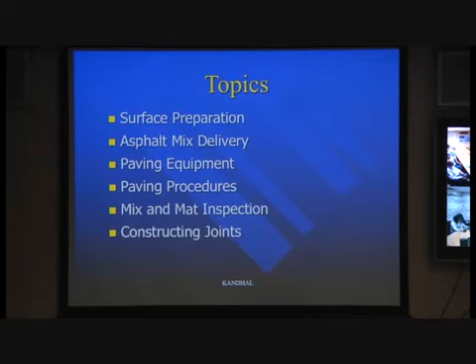First of all, you can see here that we have to clean the existing pavement. If I have, let's say this is DBM, and I'm trying to prepare for BC, and if I don't clean it and there is a layer of mud on that, and I lay BC on the layer of mud, what will happen? It won't stick there. And when I design the pavement, I assume that BC and DBM are just one slab.

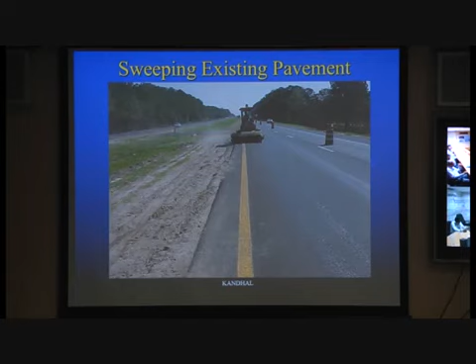If I've got a mud layer and I don't apply any tack coat, the pavement will think that it's only 40 millimeters thick, like your BC, and you will have fatigue cracking. So we've got to clean that out real good before you apply the tack coat, and then we've got to apply a tack coat to promote the bonding between the asphalt layers.

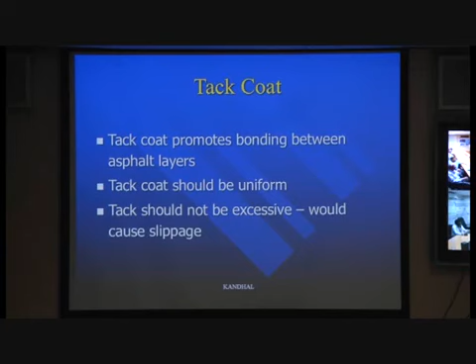That's a must. Tack coat should be uniform. Tack coat should not be excessive and would cause slippage. Some of our NHAI inspectors think that too much is good, they think the contractor is not putting enough tack coat, so they tell them to go one more time and all that. They don't understand that can cause some slippage. You might have seen some moon-shaped slippage cracks, and that will happen because of that.

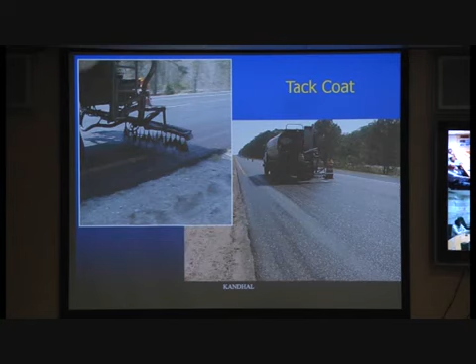So here you can see on the left side, the tack coat is being applied with a distributor with a spray bar and nozzles, and on the right side you see the bitumen distributor, the whole operation. You see the tack coat is being applied, and this is a good example of a non-uniform tack coat. Tack coat should cover the whole surface, and we use the rapid setting emulsion, not the slow setting emulsion, in India. In the US they use slow setting diluted with water, but we use rapid setting RS grade emulsion. But still we should not have this kind of non-uniform tack coat.

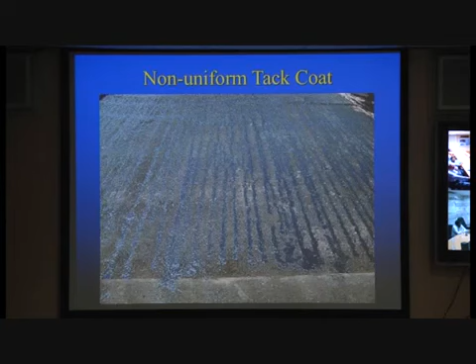Here is a good example of a non-uniform tack coat, and again it should not be too excessive. Too much is bad.

And then we have the asphalt mix delivery. We'll talk about how the asphalt is delivered after the tack coat. Well, first of all, yeah, go ahead.

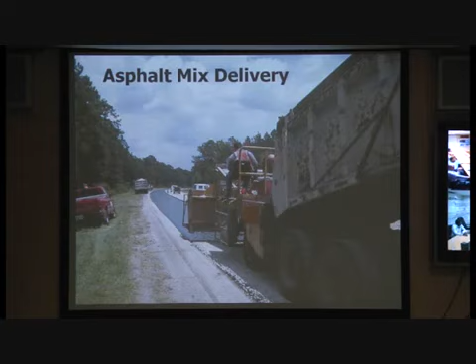The question is about when there is no tack coat. I think there is something here like a stress absorbing layer where you put aggregate as an interlayer to resist reflection cracking. Practically, one problem I have seen is after laying the tack coat, the trucks will ply on it, maybe two to three trucks at least. After plying, the tack coat is taken away by the truck. So how do we address that? Well, the question here is that when you apply a tack coat, the truck tires will stick.

The tack coat will stick to the truck tires, and some of it will be taken away. That has been a problem for many years. But since we don't need too much tack coat, and tires sometimes distribute it better, it has not caused a real problem. It looks like an issue, but even though some is carried away by the truck tires, if applied uniformly, it still covers the whole surface, so it hasn't given any problem.

But in the last few years, a new tack coat material has come out in the US that isn't picked up by the tires at all. It's called non-tracking tack coat. It's available in the US, and hopefully it will also come to India, since tack coat being affected by trucks has always been a problem.

You got a keen eye, you noticed the tack coat here. I never saw this slide before, but since I know about the stress relief layer, I could answer that. Otherwise I would have been in trouble.

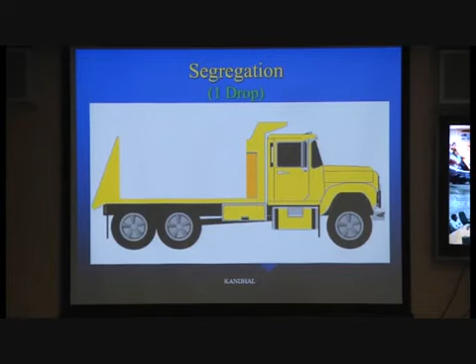This shows how to load a truck. The truck is parked below the pug mill. We can have one drop, which is not good, called segregation. When there's one big load, just one pile on the truck, that's incorrect because the coarser particles slide off to the edge and bottom of the pile, causing segregation, so when paving, some spots won't have enough fines.

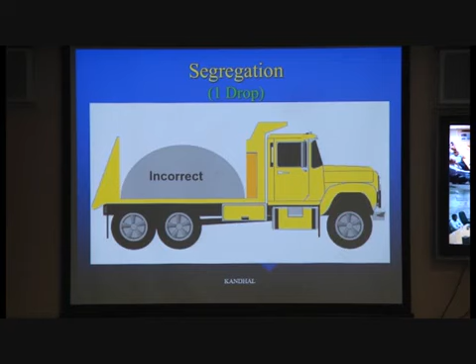To prevent that, we have to have three drops, meaning the truck has to move back and forth: drop number 1, then drop number 2 at the back end of the truck, and number 3 in the middle. That's the way to minimize segregation. But I know people don't do it.

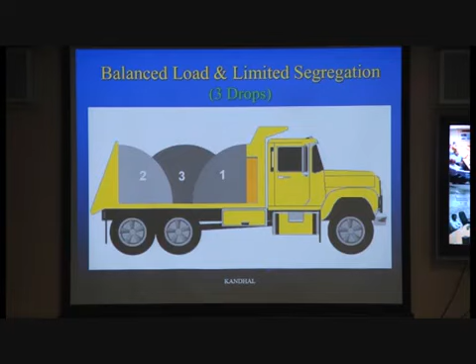Because the truck driver has to go left. They do? Is that right? That's good, they will do it. Okay, then you guys are doing good control. So that's the correct way to discharge it, that way there won't be any segregation problem.

It's good practice to always put a tarpaulin on top of the mix so it doesn't cool down, especially in winter. So tarping the load is very important. We should also check the mix temperature; some trucks have a hole through which you can test it.

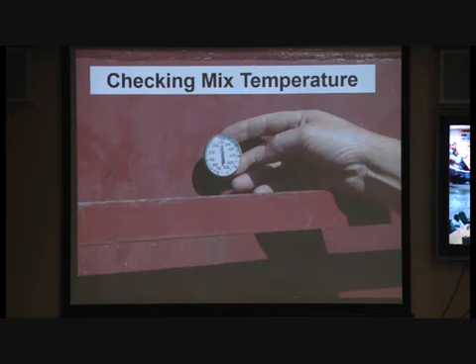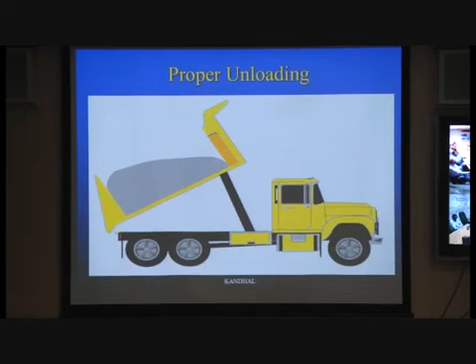Now, one thing required on national highways in the US is to have a material transfer vehicle, the so-called MTV. Because if I'm paving and there's no truck, the paver has to stop, and whenever it stops it makes a bump, sinking a little, and when you start paving again your riding quality is affected.

So what they do in the US is use this material transfer vehicle, fed on the left side—you can see the truck feeding this Roadtec MTV, as they call it. This MTV has a capacity of 25 to 30 tons, so it's always filled with hot mix, supplying the paver hopper so the paver keeps on going. It's more like a moving storage silo. It's a requirement on many US national highways to have an MTV on the project to get good riding quality.

I know the paver driver would like that because he cannot have a coffee break. He just has to keep on moving all the time.

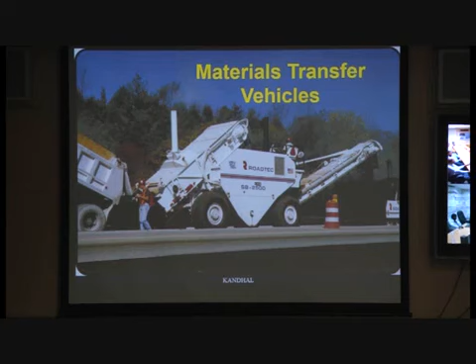But this is in the US called MTV, material transfer vehicle. We don't have it in India as yet. Here is an MTV in operation. You can see on the right side the truck is putting the mix in the MTV, which is the white equipment in the middle, and on the left side you have the paver, where the MTV is feeding the paver. So the operation just keeps on going, which gives you very good riding quality.

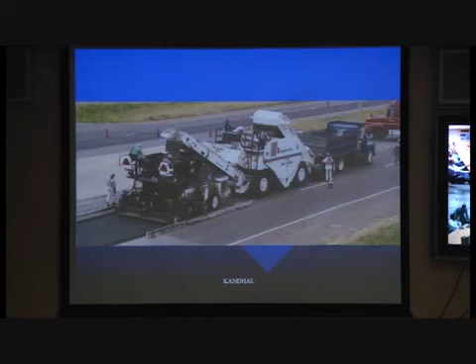Sir, but when you say that the MTV is required to avoid the stoppage of the paver, in this photograph it seems that the carriageway is not paved with a single pass, which will develop a continuous joint. No, I didn't mean that. The joint we make at the end of the day is the transverse joint. No, this longitudinal joint is possible.

Yeah, longitudinal joint. What you are doing is maybe paving for 2 or 3 kilometers, and then you move around and pave the other lane. So the so-called warm joint, it's not a cold joint. By the time the mix has cooled somewhat, that's why it's called a warm joint. That's what we do here. So I think you are asking that we cannot keep on paving for a long time. We just pave for 2 or 3 kilometers with the MTV, and then we turn around just like we do. So we are not going to change that operation, because we need to get the warm joint. Does that answer your question?

Or, I was asking if they are so particular that stopping bumps should not be there. In this also it will create a longitudinal complete line only.

No, I'm talking about the bump in the profile. When you are paving and you stop the paver, it kind of sinks a little bit. It creates a dip there, and when you resume paving, that dip is still there. So in the longitudinal profile of that lane, you get dips. Yeah, so we are trying to avoid those dips.

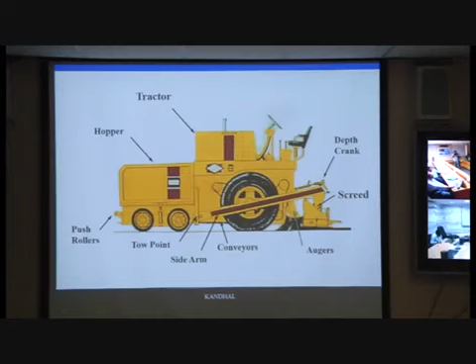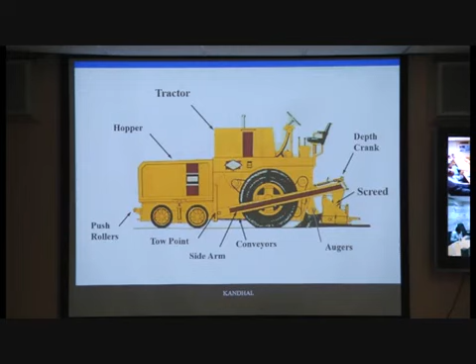You can see the screed is a free-floating type mechanism. It has a tow point where this can go up and down. The tow point is right here as marked, and the screed will go up and down, and there is the depth crank, like a wheel handle, that the person keeps moving to control the depth of the layer.

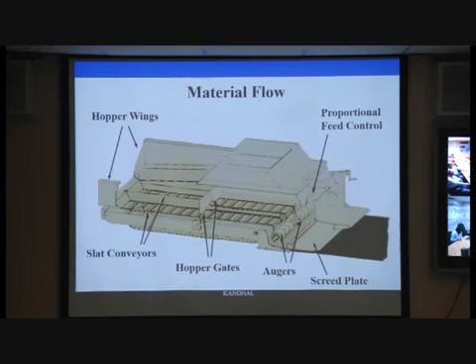And here is how the material will flow. From the left side you have the hopper wings, and there is a slat conveyor, a hopper gate, and on the back, on the right side, you have augers and the screed plate. But I'll show you a better picture in this one here.

And then these are the hopper wings. At the end of the day, I can fold these wings, and the remaining material will be used, but it's not a good practice. Sometimes what happens is that after every truck load, if no truck is coming, the paver operator will just fold these, and the material will go in the back and onto the road.

What happens is that near these hopper wings, coarser material always collects. So when I drop the wings, at the end of each truck load, you will see coarser mix in a V shape. So the best thing is not to drop it at all. Let it accumulate for the whole day, and then at the end of the day you just waste it or do whatever with it. So that's a big problem here.

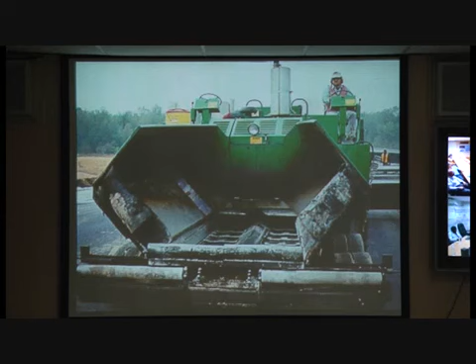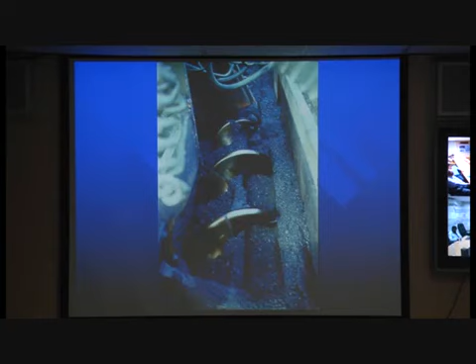So here you can see the conveyor is taking it to the back, and there is a gate, and here the auger on the back will spread the mix across the whole entire width. Whatever we have, 4 meter or whatever, the auger will spread it out.

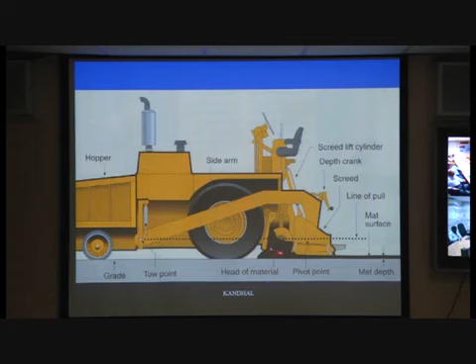So here in this picture, the main thing is that again we can see the screed, and it's free floating. There is a tow point here. This mix is free floating. The mix is here, but it's more clear in the next slide where we got 3 situations.

On the top, the mix is of sufficient amount, so it's maintaining the correct depth. Like if I need 40 millimeter BC, I have to have the right amount of mix in front of my screed, so I get 40 millimeter.

If the head of the material volume is too high, then that will cause the screed to raise, and excess material will be coming out of that. At the bottom, if the head of material volume is too low, then I would have inadequate material in the back.

So the top situation is the best, and that's what that crank control we see. That guy is operating the crank control. He's regulating the speed, trying to control the material which is in front of the screed.

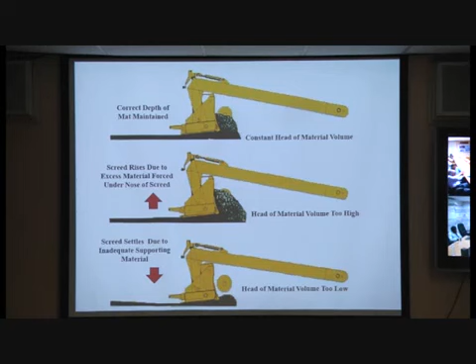But you shouldn't do that too much. Sometimes they just keep on changing, they react too fast, because once they do it, it takes some time before you get to the desired depth. At this stage, sometimes most of segregation happens.

Why is it? Yeah, most of the time it happens because of the truck to truck load, or how the mix is being fed into the paver. There's a lot of segregation that takes place here also, besides the loading of the truck.

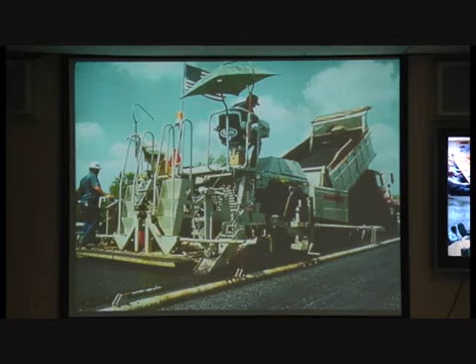That has to match with my paving operation and compaction. How many rollers do I have? They both have to be matched. If I have less trucks, then I have a problem, the paver has to stop. If I got too many trucks, then they will just wait.

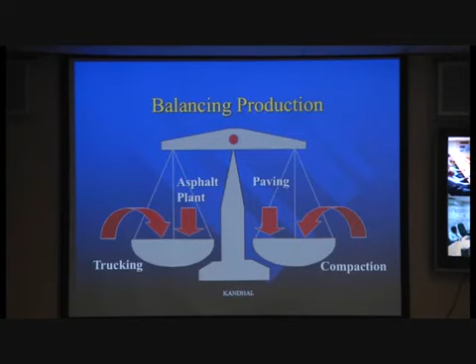So here's another picture of that. These are the mix deficiencies. As an inspector, we have to watch out for these things.

If I see a blue smoke coming out of the truck, that means the mix is overheated. If I'm looking for 150 degrees Celsius, it might be 180, 200. So blue smoke will indicate overheating of mix.

Stiffness - sometimes the mix might be stiff, when the truck is discharging the mix to the paver, it's not flowing real good, or some of the mix will kind of just stay there, which is very stiff. That will show low binder content, low bitumen content, or low temperature.

Slumping - sometimes I see in the truck, the mix is not supposed to be level, but sometimes it's just level, like it has slumped, like leveled concrete. That means there's a high moisture content - we did not dry the aggregate well, so there's higher moisture content in the mix, or higher binder content. These will cause the slump.

So if there's some slump, you just stop the work, find out what's happening. Bleeding happens sometimes right away, so higher binder content. If the mix has a lean and dull look, not shiny, very dull, it could be low binder content, excessive fines, or burnt mix. So if you see that kind of thing, you got to stop the paving and find out what's causing this dull look.

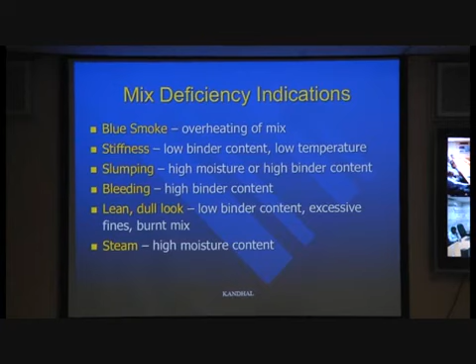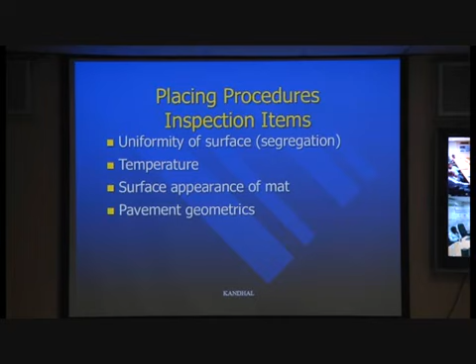About placing procedure, we have to see that there is no segregation, it's uniform, and the temperature is okay. These days we have infrared guns that people keep to monitor the temperature of the mix behind the paver. Surface appearance of the mat should be good, and pavement geometrics should be okay—whether you have the right curve, the super elevation, and all that, you got to see that.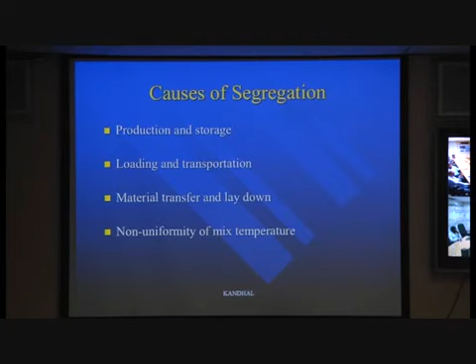Causes of segregation include production, storage, loading and transportation, material transfer and laydown, and non-uniformity of mix temperature. What we have seen here is that sometimes the mix has a segregation which is called temperature segregation.

So this is called temperature segregation. If you have a particular material which is cold, it becomes stiff, while the other high temperature material will be smooth flowing, and that can cause a problem.

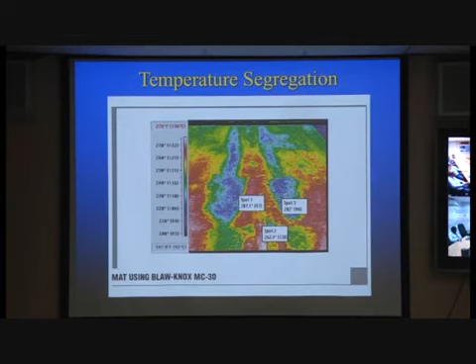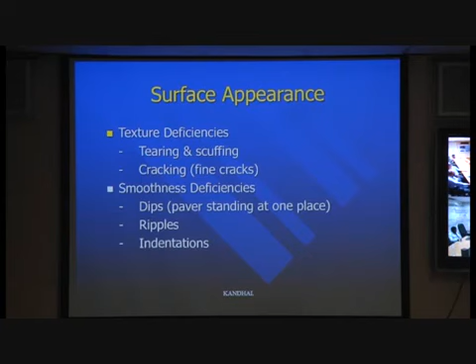Then we also take the measurement for the depth, I think. Surface appearance and texture deficiency should not show any tearing, scuffing, or fine cracks. Smoothness issues can include dips, the paver standing in one place, or ripples—these kinds of things we got to watch out for, along with thickness, grade of the road, alignment, and crown.

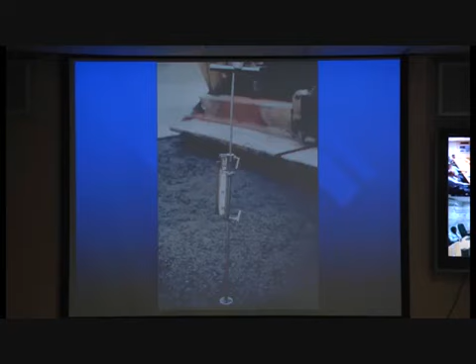Here is, I think, a dipstick used to measure the depth of the loose mix behind the paver.

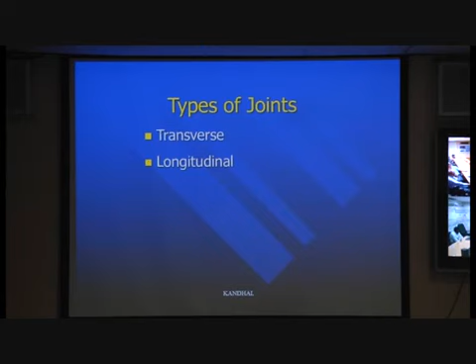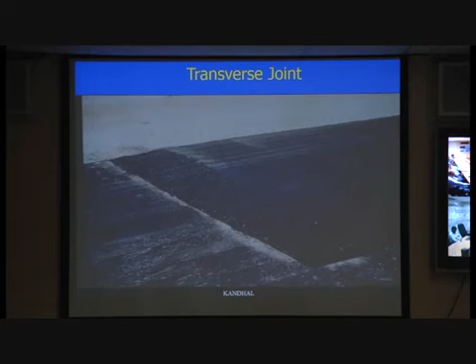Now we go to constructing the joint. We have two types of joint: transverse and longitudinal. A transverse joint is made at the end of the day so we can resume paving the next day. There are two ways to make it—one is the bulkhead transverse joint, where I put a wood lumber here and then make a ramp.

Next day when I come, I just remove the lumber, so that gives me a vertical face at the bottom, and I remove the ramp. Then I can start the new mat the following day with the same thickness. So that's one way to make a transverse joint.

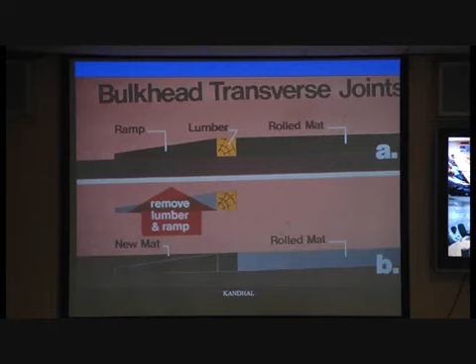The other way is a paper transverse joint, where I don't use lumber or wood. I just use paper in a slope, making a ramp so traffic can still use it without any bump. The next day I remove the ramp and the paper, which gives me a good face—not vertical, but about 45 degrees, a good clean face there.

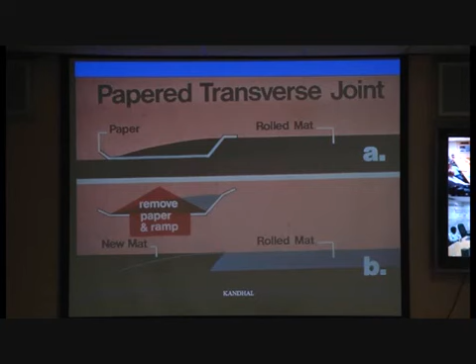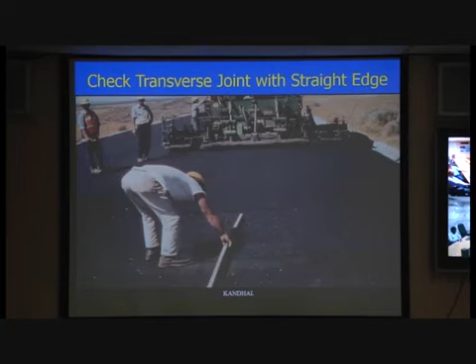The next day when I pave in that direction, I make sure the transverse joint is really good without any bump, so I use a straight edge to check that out.

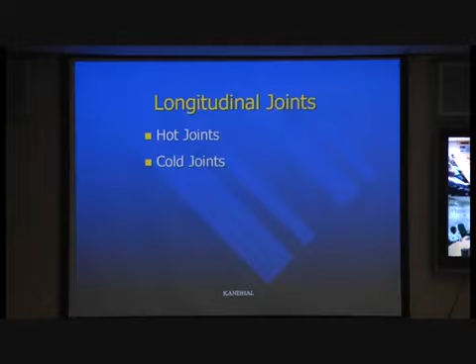So which joint is best—should it be trapezoidal shape or vertical shape? Well, both are acceptable. It should not be jagged type; it should be a clean cut, either vertical or at 45 degrees or whatever angle, not left jagged.

The next day you still have to make a ramp. So when you remove the ramp next day, what do you do? It's very difficult to remove that ramp and get a good clean face unless you take a saw. I don't know what the practice is in India—can anybody comment how you make the transverse joint? Straight cut.

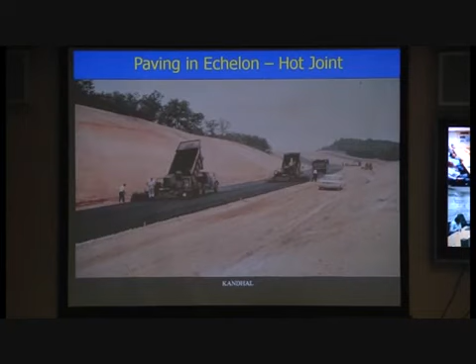Then we talk about the longitudinal joint, and the best way to make it is to get a hot joint—that's the best way, and it's only possible if you pave in echelon. That means two pavers going side by side, with the mix hot on both of them, so I get a hot joint like a welding—no problem. It will give me a good joint, and you won't be able to see the joint at all.

This kind of paving is very prevalent in airfield runway operations, because on highways we don't have much of a problem with the longitudinal joint—we might have two lanes, and you can use a wide paver for that. But if you've got three lanes, then you have a problem.

But in the airfield, typically the runway width is like 150 feet, so you've got to have many longitudinal joints, and you have to make a good longitudinal joint, because you cannot afford a bad joint—if material starts to come out at a joint, it can be sucked into the jet engine and ruin it right away. Even a bird going into a jet engine ruins it, so even a small stone can cause damage. This is very common in airfield construction, and there are also other ways which are shown to you.

Echelon means side by side, close to each other - that's the term for this type of paving. Echelon means 2 pavers, or you can also have 3 pavers if you want, but you have to supply the 3 pavers and use like 2 hot mix plants or whatever.

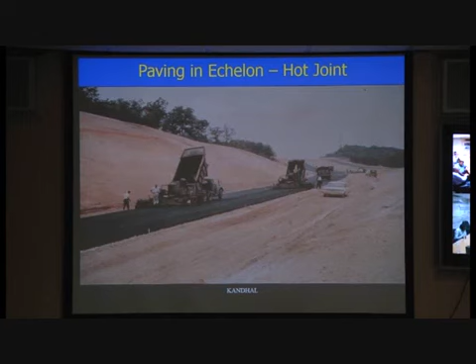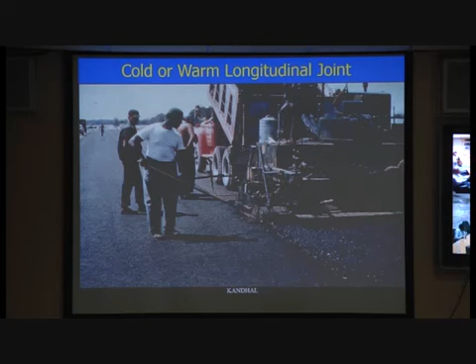Here's a typical layer - we have paved the lane on the left side, and we are paving on the right side of the lane. So we are getting a warm joint here, because you have to do it in the same day. That's why you call it warm, although I don't think it's still warm - sometimes it can become cold depending on the weather.

The main thing this slide is showing is that on the right side we have a compacted mat, and on the left side we have an uncompacted mat which is loose. So we have to have an overlap between the two, and here it's showing an overlap of 1 to 1.5 inch, or 25 to 40 millimeters. Don't go more than that - sometimes they have too much overlap, so that will be the ideal overlap.

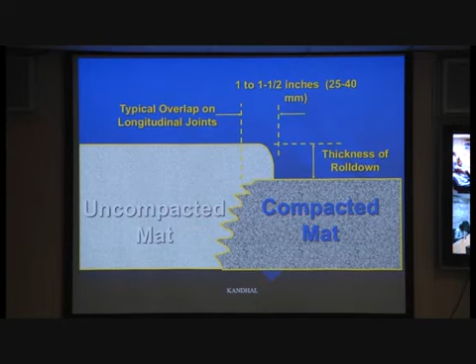Because here we have a low density zone. When we compact this mat on the right side, the edge was not compacted that good because it was unconfined, so the mix kind of pushed out. So if I have enough more material here and then I press it down, it will all go in here because I've got a low density zone.

Now what they do in India all the time, and I prevent that, is they don't bump back just here - they bump back all the way, which is called broadcasting. They just shoot it, and it goes farther away. In fact, it creates a lot of coarse aggregate. And the idea here is I need to have extra material right on the joint - that idea is gone when they do it that way.

And sometimes they do it so much that it makes a dip there. So we have to be very particular about this bumping back - you just bump back enough to get the extra material right on the edge. If you go beyond that, you are defeating the purpose. So this is something you must implement on your project.

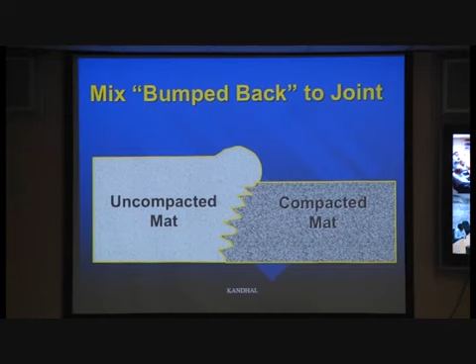But about this bumping back - here is a pavement edge cutting. If I am building an airfield, then on the right side I paved it real good, and I know there is a low density zone here. So in airfields they use a cutting edge to make it vertical, and they discard 2 or 3 inches of the material which was low density. With airfields they really want good density on both sides.

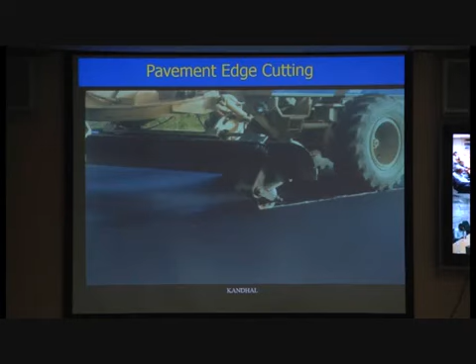And good longitudinal joint. There is one more called a tapered longitudinal joint, which is used in the US. The lane on the left side was paved first, and in the screed they have some sort of arrangement, so you get a vertical drop off and then a slope of 1:12. Then when you pave this one there is an overlap here - so we don't get a vertical thing, we get an overlap or wedging, so the longitudinal joint doesn't show up.

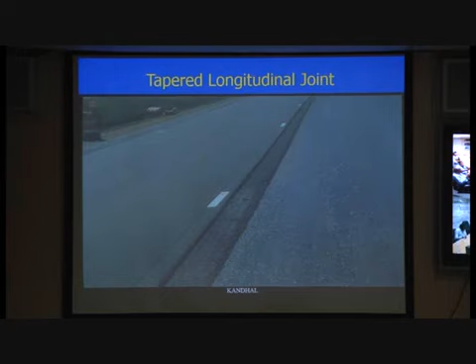That's another technique. It's not difficult - when you have a screed, you put a steel plate in the screed which will make that shape.

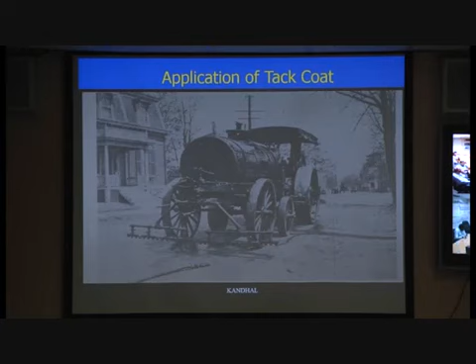Just the last slide to show you what kind of equipment we had 100 years ago in the US to apply the tack coat. You see here there was no paver at that time, so people were spreading the hot mix by hand.